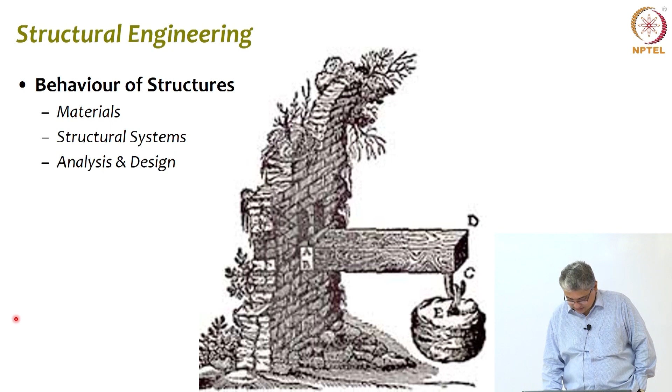This is a very important thing, so we need to understand some basic features of these materials, and what as engineers we are looking for in them. We can't do justice to all of this in a 50-minute class, but we'll look at some interesting systems, and then talk about analysis and design, and what it takes to eventually make a structure.

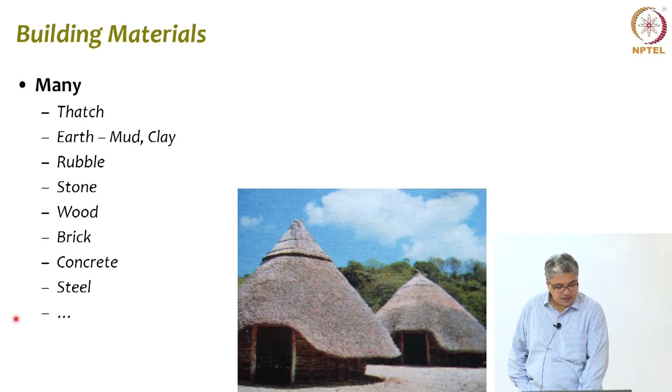Talking about materials, in civil engineering we've used a lot of these, starting from simple thatch to earth, mud, clay, then stone, wood. Wood is a very important material that has been used very successfully in civil engineering. Then of course brick, concrete, steel, and so on. I won't go into the details of all these, but what are we looking for when we talk about materials?

We are looking to understand some basic properties, and the two fundamental things we look for are chemical and mechanical properties. How is the material manufactured? If it's not a natural material but a man-made one, what constituents are added to make that material is the first thing, and then what properties help us actually create structures out of those materials.

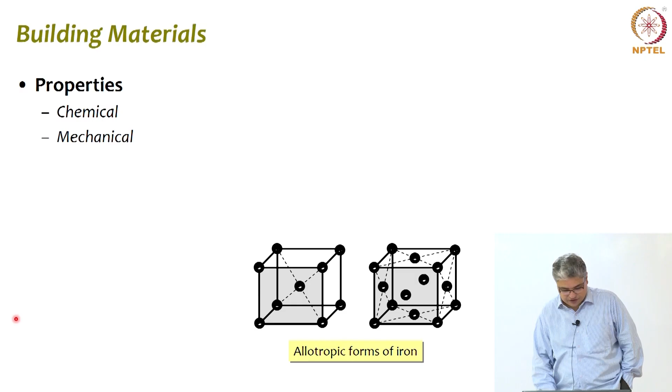Chemical properties are very important. For instance, steel is a very common material we see today, and that steel starts from iron ore, but it has to be processed and made into a form we can use in construction. You see two different allotropic forms of iron which give certain basic properties to steel. I won't go into the details, but chemical properties are important.

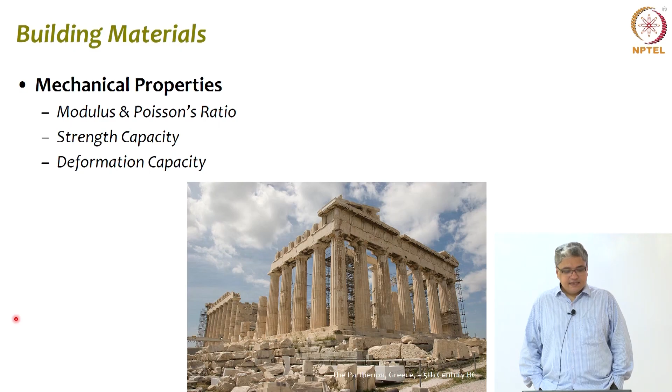Similarly, cement and other materials have compositions of different ingredients that give them their characteristics. Talking about mechanical properties, there are many important properties for different cases, but the fundamental things you must know at this stage are modulus of elasticity, Poisson's ratio—which is nothing new, you've all learnt it in physics—and then strength capacity and deformation capacity. Let us see what this is.

If we start with a material, the first thing we talk about is its stress-strain curve. All of you are familiar with this from your school days. Let me draw some stress-strain curves—it doesn't matter what material, just look at the nature of it. Typically, initially there is a more or less linear elastic portion, then it touches a maxima in terms of stress, and then the material moves or deforms by different amounts depending on strain.

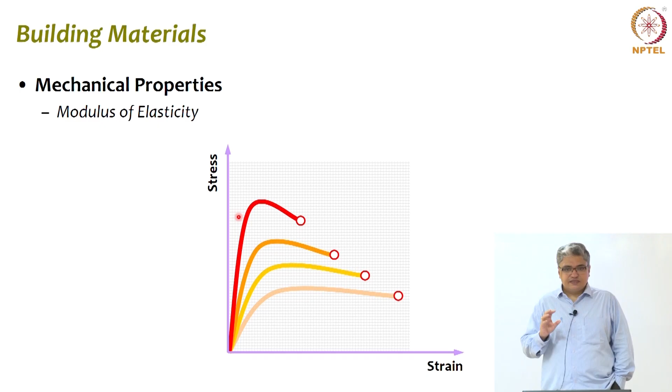The modulus is this initial slope between the stress-strain curve; this initial slope is called the modulus of elasticity. Obviously different materials have different modulus of elasticity. For example, if we talk about steel, the modulus of elasticity of all steels varies more or less between 200 to 205 to 210 GPa. GPa is Gigapascal—Pascal is Newton per meter square.

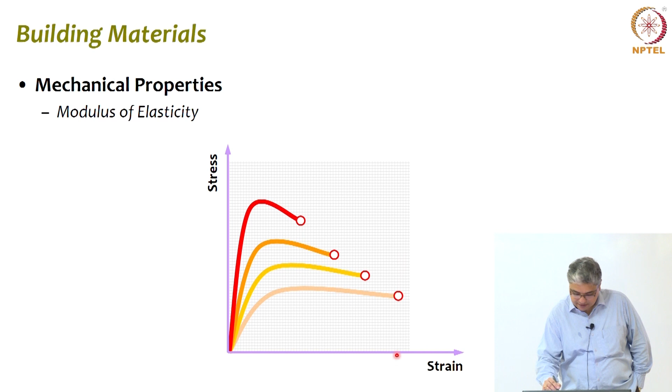Similarly, if you look at different materials, you'll see they have different modulus values, and different materials will also have different Poisson's ratios. But more than that, as structural engineers, we will be looking very closely at the maximum stress that a material can handle and the maximum strain that a material can handle.

So let us look at it. These numbers are not fixed numbers, they are ballpark numbers, approximate values, just to give you an idea. So when you talk about compressive, what is compressive? I have a system and I apply load, so it gets compressed, so the word comes from that. So if you compress something, how much stress can it take? And what is stress? Load per unit area, from your physics days.

Typically, if you see here, the masonry, the brick, it takes some amount of compression. Stone, certain forms of stone, not all rocks, but certain forms can take something like this. Wood, when used in a certain fashion, will be able to take so much.

But then we had a quantum jump. We have been using these for millennia, thousands and hundreds of years. And suddenly only in the last century we jumped from this to this, and you can see there is a jump, and then another jump here. So in the last 100 years, civil engineering or structural engineering took a quantum jump in terms of how much load per unit area the material and therefore the structure can take. It helps us suddenly expand the scale of our engineering.

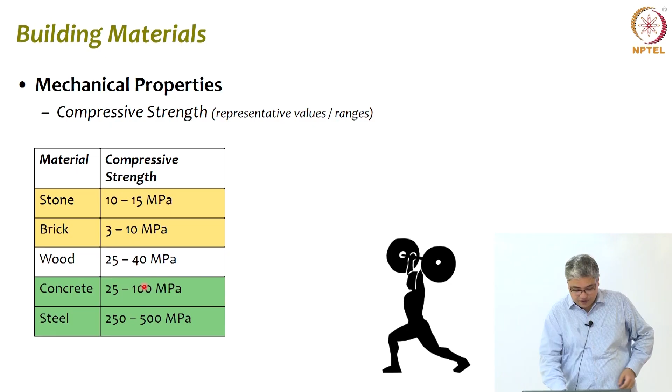So we see that there's a basic difference in the material properties. We will keep in mind that certain materials can take compression to an extent but cannot take tension, and certain materials are good in carrying both tension and compression. And this concept, if we understand, we will understand why we are building certain structures today using certain materials which we were not able to do earlier.

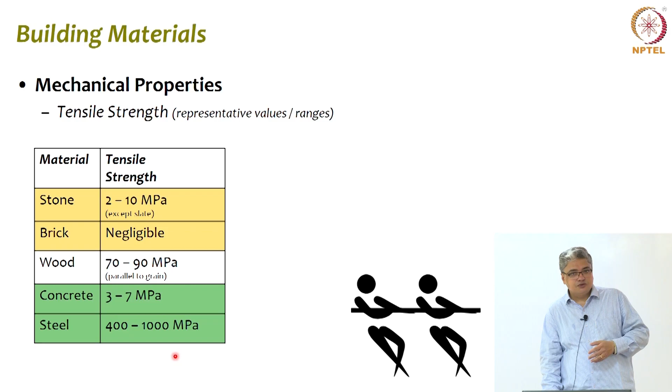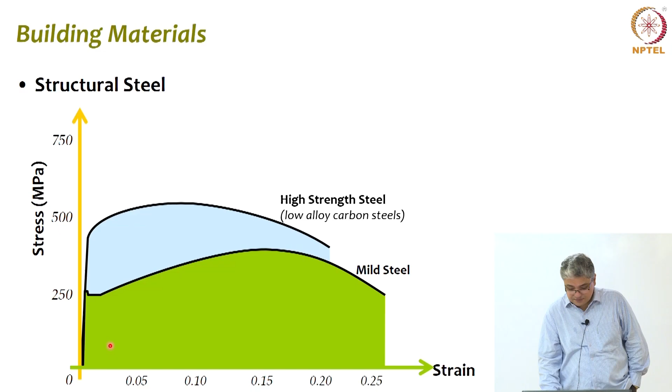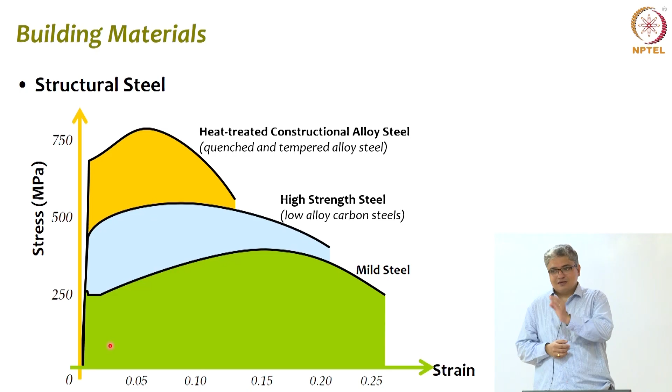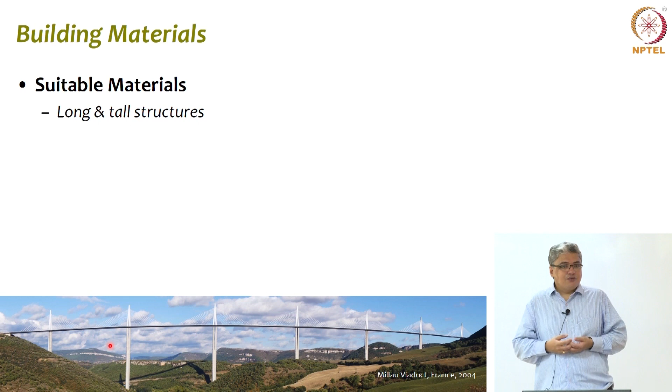The same steel, we can change the chemical composition or manufacturing process and create different strengths. One classic example you see today is that we have steel, or iron, which we know rusts, and then we have stainless steel. So we change the chemical composition a little bit so that we are able to create what is called stainless steel. Go and find out what is added to make stainless steel. Very interesting exercise. So basically what I am trying to impress upon you is that material, or availability of material, plays a very important role in deciding whether we will be able to build these tall structures, long structures that we see today, we are eager to build.

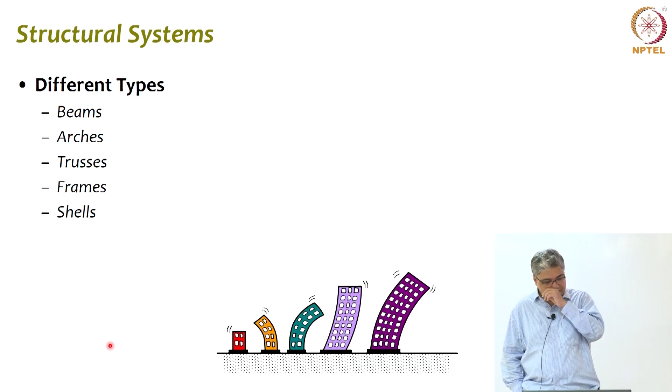Talking of structural systems, there are different types of systems. Starting with simple beams, we will see examples of simple beams, we will see arches, then we have trusses, frames, shells, and so on and so forth. What you see here is a very simple example. What you see here is what is called a cantilever.

What is a cantilever? It's like my arm which is projecting out from my body, and imagine I'm holding a load, right, that load is hanging. So this weight is acting on my arm and something is happening to my arm.

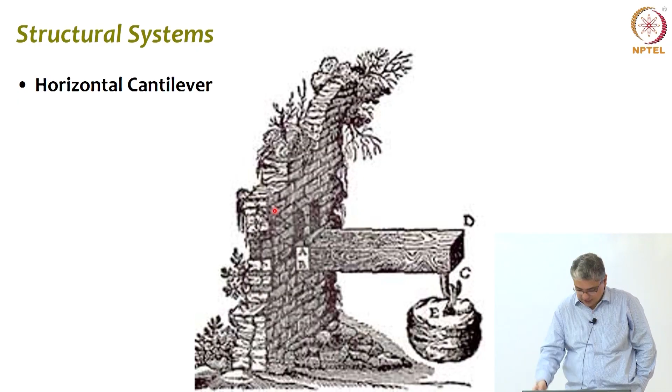Here you see a cantilever, here is the cantilever portion, here is the load, and something is happening here. Our focus is to understand, not just see and say, oh, beautiful picture. We'll appreciate these beautiful photographs, but as structural engineers we'll try to understand what is actually happening within this system.

If I go on increasing this load, my hand will start doing this, so I can either bend about this hinge, or if I put it fixed, my hand will be straight. You can try this with an eraser, putting a load on one side, hold it, and you will see it bend.

When it bends, you will see one side getting stretched, whereas the bottom side is getting compressed. When I say stretching, it is under tension, and when I say compressing, it's under compression. So now think of what material it is made up of.

If you have a material which is very weak in taking tension, that material will fail, will break off, and you will not have that cantilever working. So for this to work, two things have to happen: the tensile or compressive stress must be less than the capacity of the material, and the higher the capacity of the material, the more load we can apply on the system. It's simple in that sense.

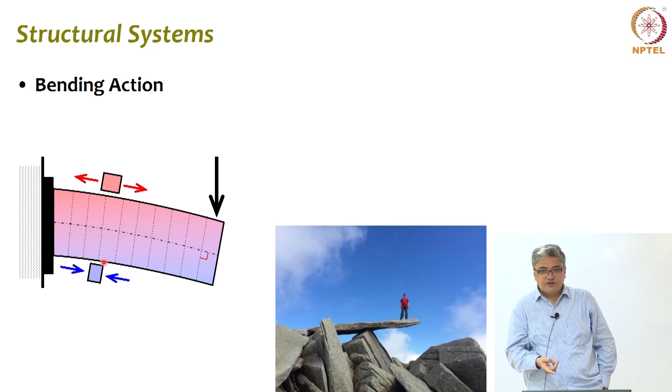So we need material which is able to carry this tensile force as well as this compressive force. If we have a material which cannot take any tension, can we make a cantilever out of it? No, simple as that. That was a horizontal cantilever.

All the structures you see standing today, if you just turn the reference, instead of having your x-y axis like this, put it up, turn it 90 degrees, and you see all these structures as vertical cantilevers, having some load acting along the direction of gravity, and some load coming on from the sides, like wind load, wind pressure, and things like that.

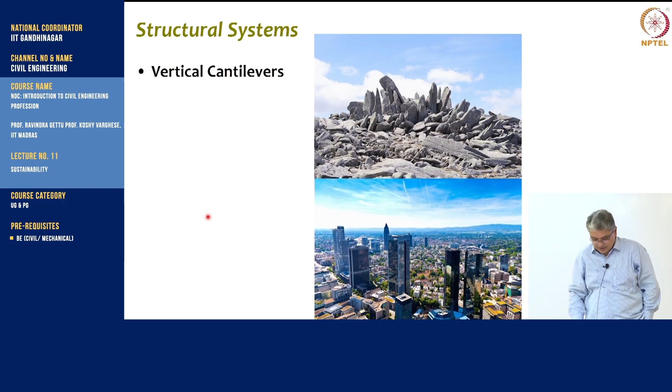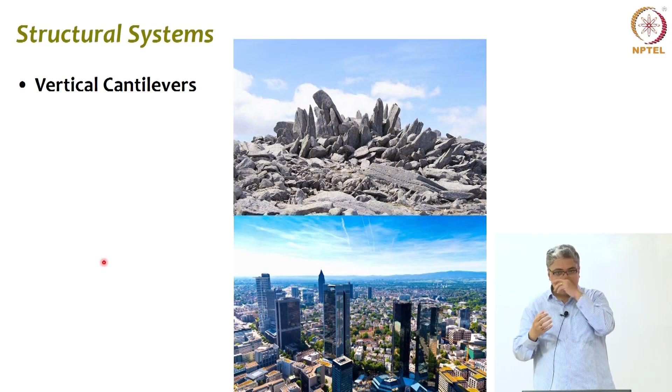So these are all vertical cantilevers. Next time you look at a building, that building is nothing as simple as this, or that rubber eraser which you are bending. Only the scale is different, the actions on it are different, and we'll have certain internal details to understand how that building can be designed and constructed.

In nature, there are hundreds of examples of beautiful structural forms and structural systems. The simplest is a branch, which is again nothing but a cantilever. But if you watch carefully, the branch is thicker, wider, bigger where it springs from, and as it moves along it becomes thinner, which is obvious because of moment, which you've learned in physics. If I put a load here, the moment only increases, and that's why that's the natural form which helps. Taking cue from nature, we have built beautiful structures using that same concept.

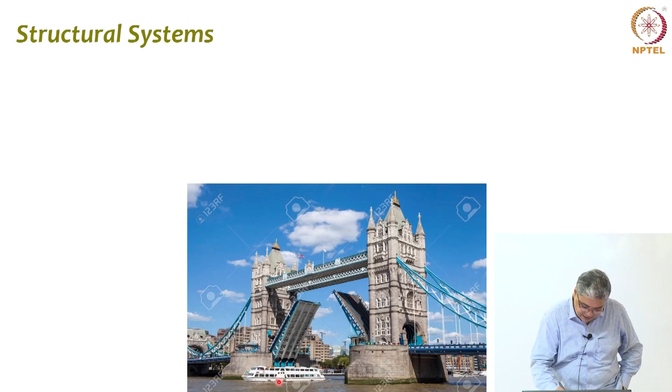This is the Tower Bridge, and if you see here, this is the deck, these two parts of the deck which open up to let these move through. So now it is neither a horizontal one nor a vertical one, but in some inclined position, doesn't matter. But that's a cantilever which is supporting its load, and you see this end is wider than this free end.

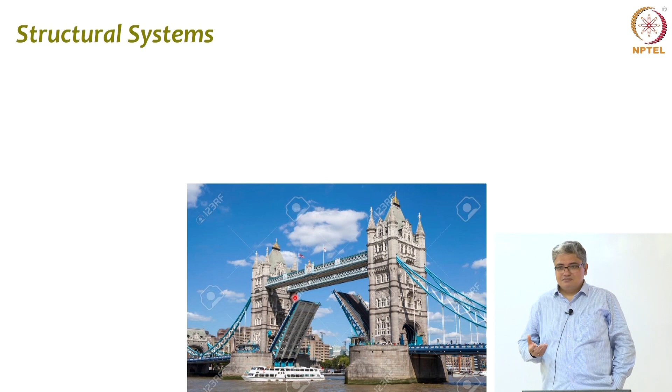It's so natural. What you see here is construction of two very famous bridges, and these are the cantilever portions projecting out from this support. This is a twin one, so two cantilevers projecting on from both sides, basically supporting each other, balancing each other. If I put one load on this side and nothing here, I'll be tilting, but here slowly they're projecting on both sides and balancing each other.

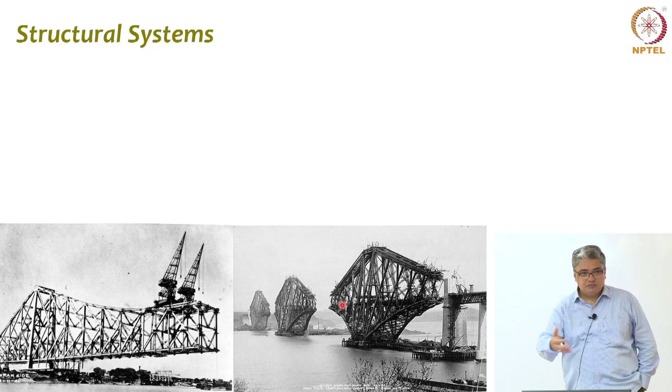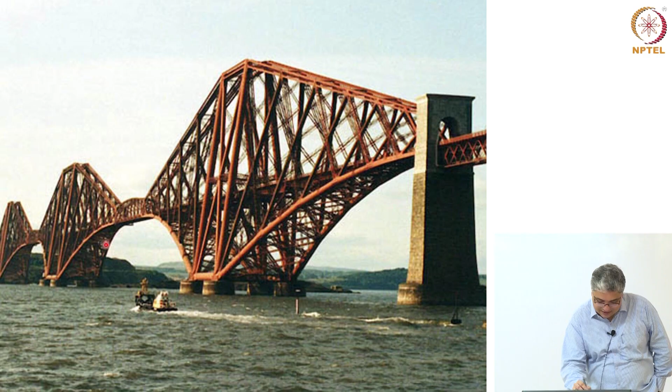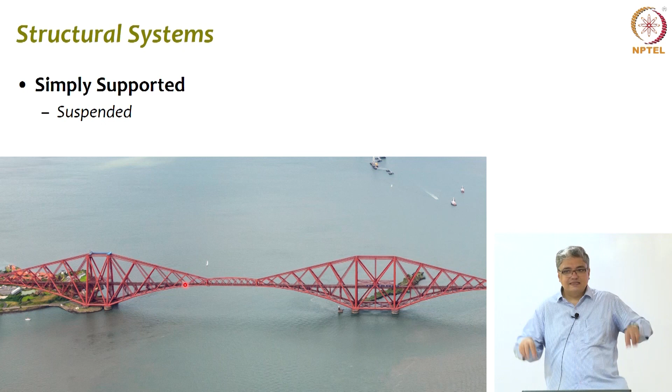Such a beautiful concept, very high end engineering done using simple principles. And obviously we have this, beautiful, right? Here you see a cantilever, here you see a cantilever, here is a cantilever, but watch this little fellow. That portion, if you see, is supported on this cantilever and this cantilever, and it's actually a suspended one, which is another beautiful form of system, a simply supported system.

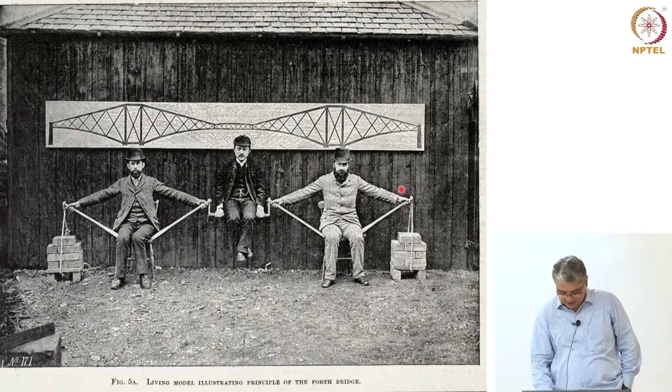This is the simply supported span, and these are the counterweights which are acting here, basically the other spans. Beautiful concept, high end engineering, done with basic understanding.

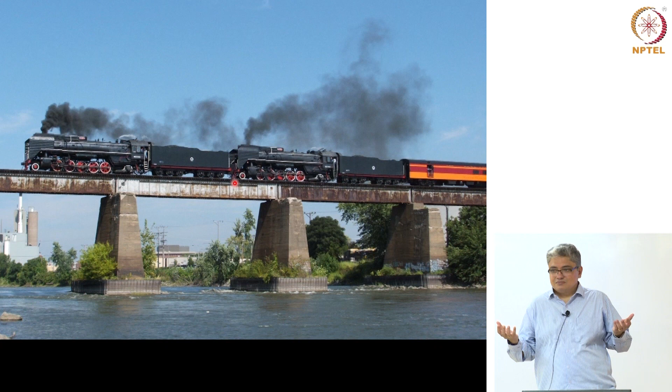This is what we call a simply supported beam, so simple, the best example we have seen for so many thousands of years. Bridging the gap between two supports, the simplest form of structure we have been using for ages now.

I'll urge you to go to our main gate, the out gate, and see the flyover. There you will see exactly those kind of things, this deck in parts rested on these piers. Go and have a look at it. We have used this for thousands of years.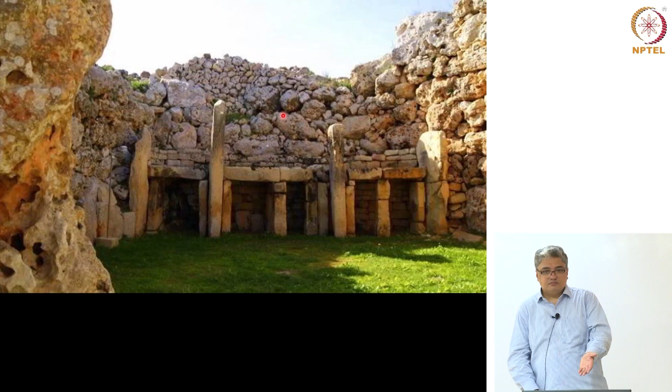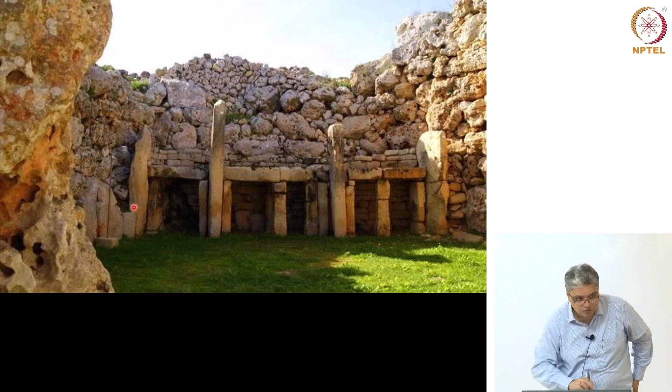The famous caves of Malta, you will see this - these stones, simply supported beams supporting all this load, and it's there. But these beams, either this way or as a cantilever, bend, and bending means tension and compression.

What if we have a material which cannot take tension? We cannot use that. So naturally, we have seen forms where it is not this way, but rather this way. What this does is what we call an arch.

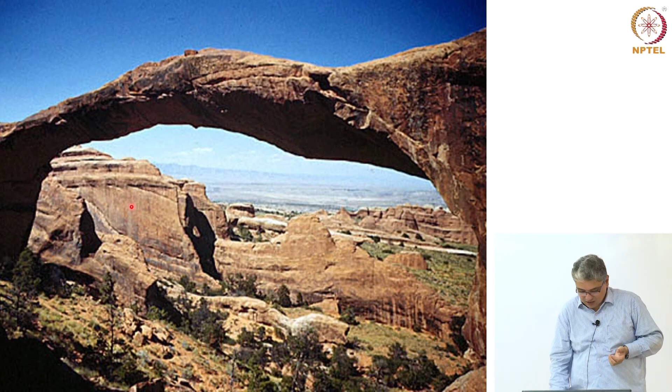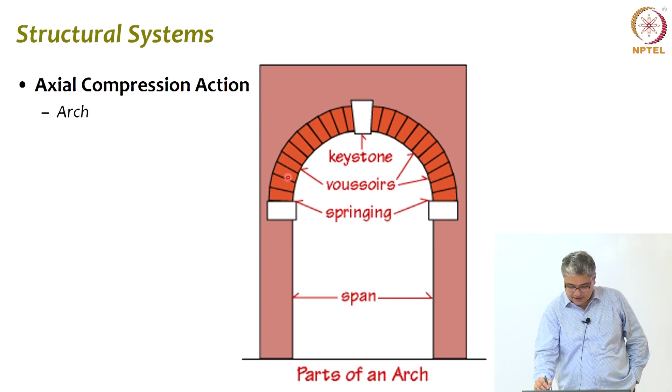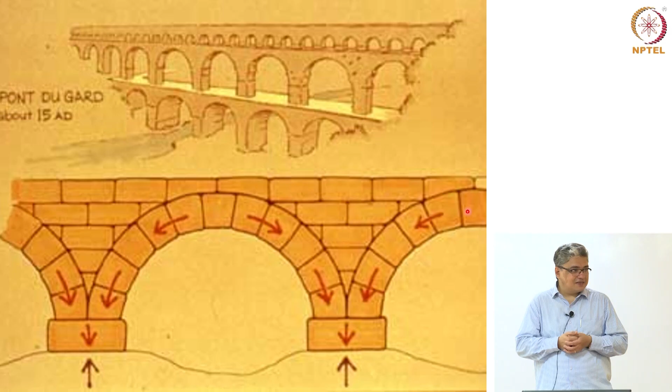So here you have a system where the load flows directly to the supports through axial action. It does not cause bending as such. Suddenly we find that with this kind of form, we can even use materials which cannot take tension, which do not have tensile capacity. And no wonder we built all these beautiful structures.

If you remember, the earlier bridges were mostly arch type bridges, not simply supported or cantilever bridges - those are modern. The old bridges are all arch type because they used materials which were able to carry compression, and this form enabled that kind of system. Of course, we innovated, we had concrete, we built so many stone arches, and then in the 18th century, iron - this is one of the earliest iron bridges, but we continued with that form.

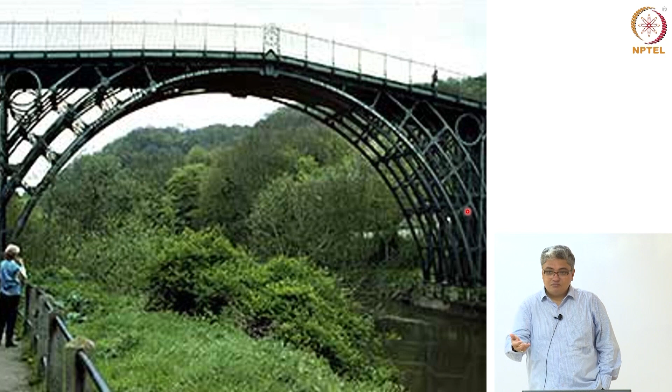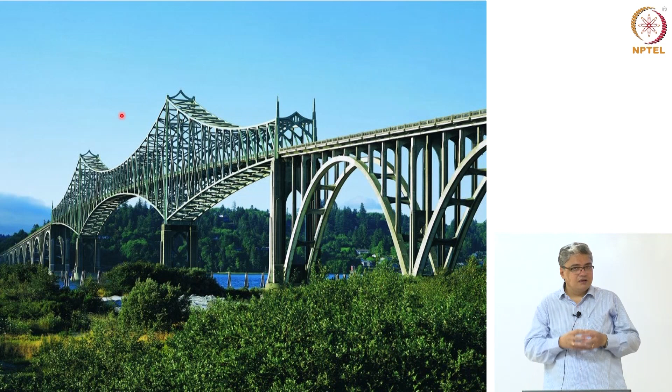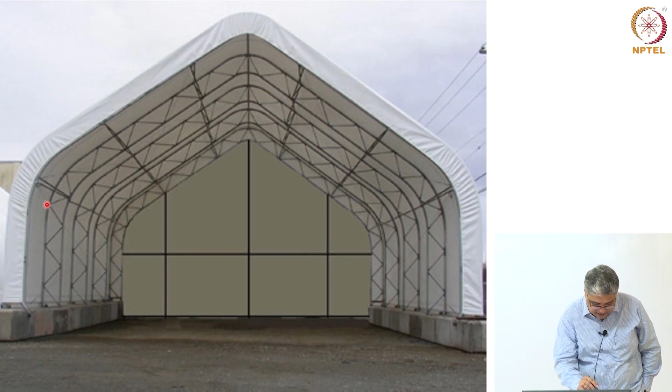Starting with a simple idea, talking of simple structures, you can create a simple shade like this. What you see here going like these are bracings for support, for stability of the system, and truss systems are very useful in creating such bracings. These bracings can be massive depending on what you are talking about.

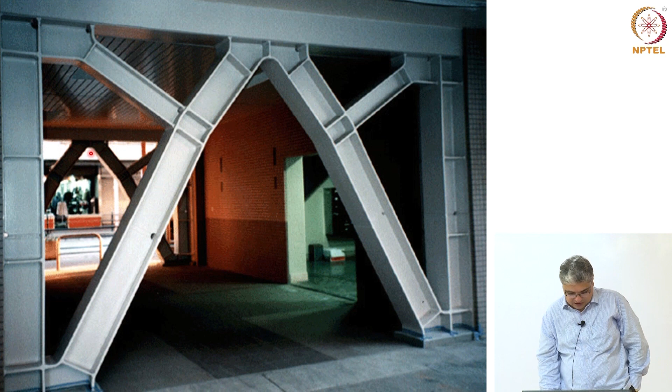So here you see a braced kind of an eccentric system, but the more common system that at least in your undergraduate days you will have to learn and understand is how we create these simple structures like buildings today.

So if you look at a building system, here you have the foundation, then what goes in a vertical direction is what is called a column, and then you have these horizontal members connecting each of these columns called beams, and then of course you have the flat surface on top, which we call a slab.

So when I am standing here, or a person is standing here, his load goes through the slab into these horizontal members called beams, which then transfer it to these vertical members called columns, and they transfer it back to the foundation and finally to the soil.

So at least this simple thing is what we will try and teach you, how to design, how to make this structure happen. In this you also see another system which is called walls - these are much bigger, wider than these members. So you can have walls and frame action all going together and so on and so forth.

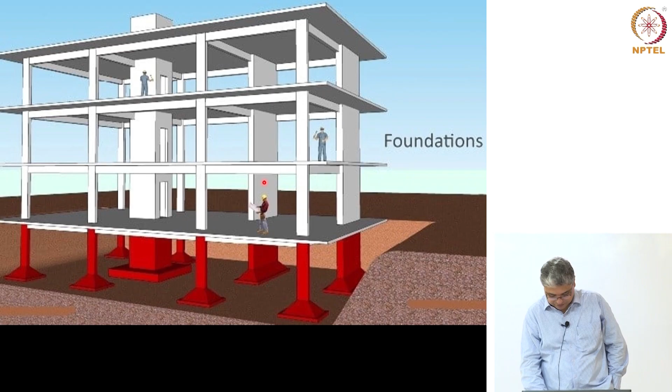But going back, this flat surface, the flat roof or the flat floor that you saw - you will see if you go to your hostels where you have large spaces, small rooms, you have a flat roof. But if you go to a very large hall, you will see that slab, that roof is not just a flat system, something more has to happen. Sometimes you will find ribs, and even more than that, obviously these kind of systems do not work.

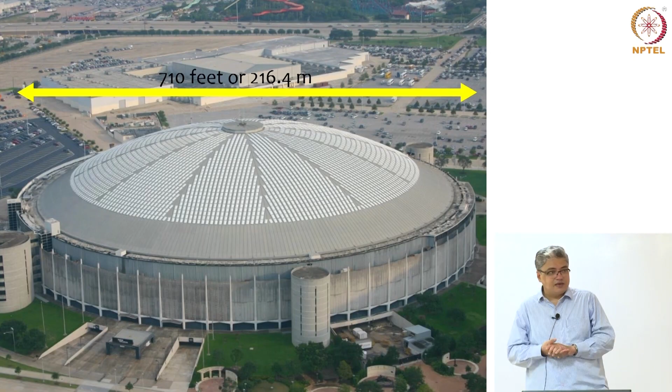In the 60s we created a stadium with a cover, and you can see from the top the system looks very similar, but look at the number now - a staggering number, right. And this was possible with slight modification of the system.

This is actually the inside view. So we are not creating a dome as such, but we are creating a system with different materials where we kind of replicate that action to the extent possible, and then transfer load and essentially cover larger and larger area.

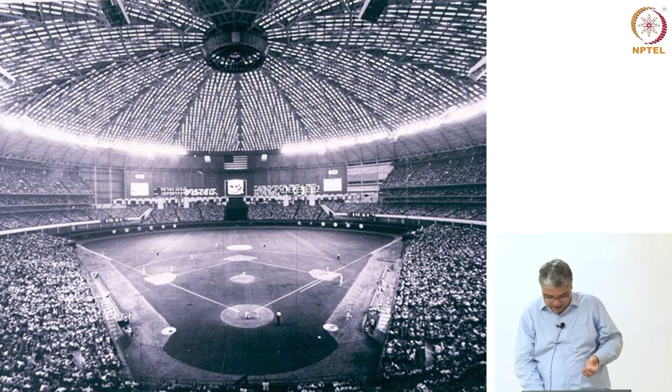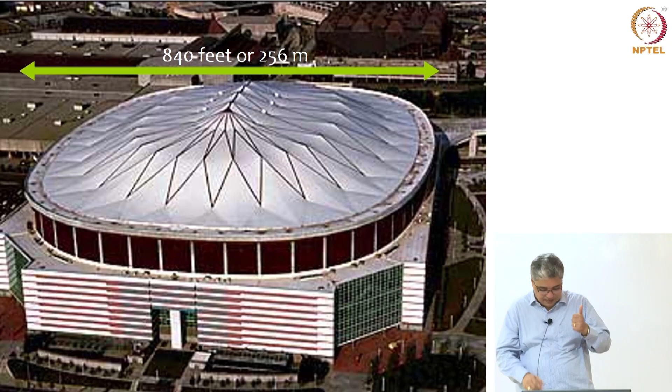And then of course, we have this. So this obviously cannot be done with materials used 2000 years back, and the structural system also is different, and we need to understand how do we create these systems, and that brings us to the next item, which is analysis and design.

We have to analyze the system to understand how a load applied to the structure is going to eventually get to the soil, which is going to support all the loads, and that whole process is analysis and design. So we saw this - our objective was a structure must be safe, useful, and beautiful.

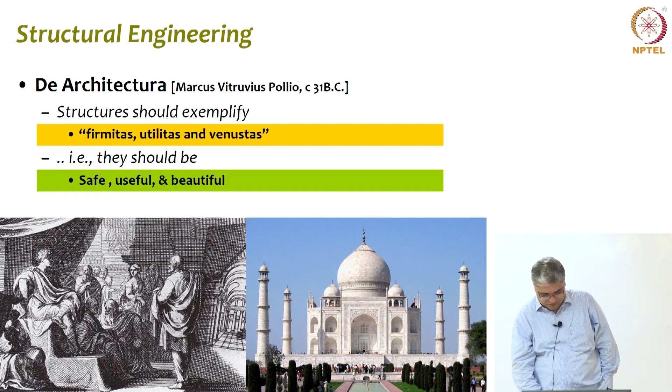So what is safety? Safety is understanding the behavior. If we understand behavior, we will ensure that structure continues to stay there and do the work it is supposed to do without itself failing or causing injury and harm to others.

So analysis is that process which helps us understand how a structure would behave, and design is that process which helps us control the behavior. We want the structure to behave in a certain way, so we control it through our activities as designers, as structural engineers. That is the process of design, and analysis is how, once we create it, it is going to behave - that process is analysis.